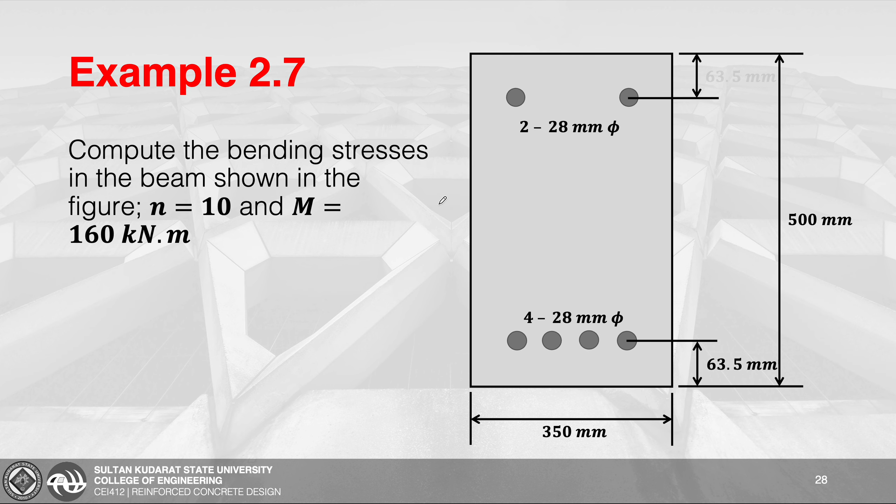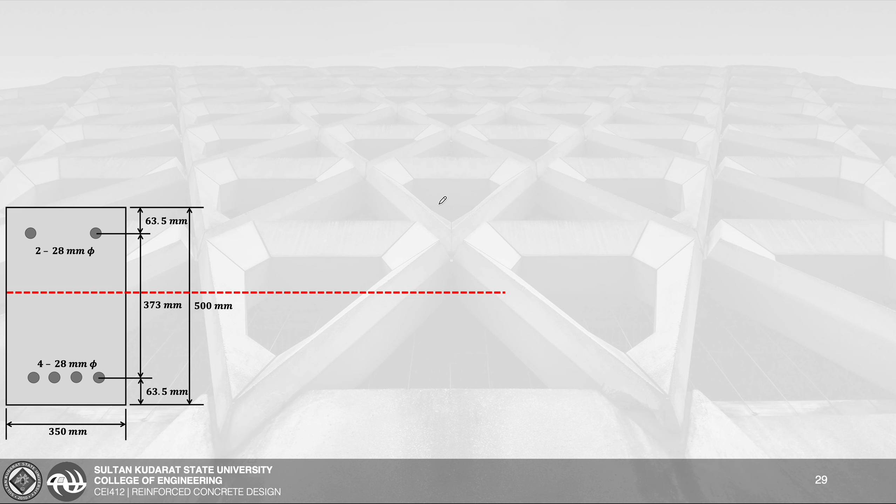Now, for our solution here, first, mag-project tayo ng location ng ating neutral axis. After that, yung mga construction lines for our guide. Now, take note, this is considered to be a doubly reinforced na concrete. Bakit tinawag siya na doubly reinforced? Kasi meron tayong compression steel, tsaka meron tayong tension steel. So, since meron tayong compression steel dito, we still have to transform it into its equivalent na fictitious na concrete area. So, yung equation dito, basta compression steel, is (2n minus 1) times As prime.

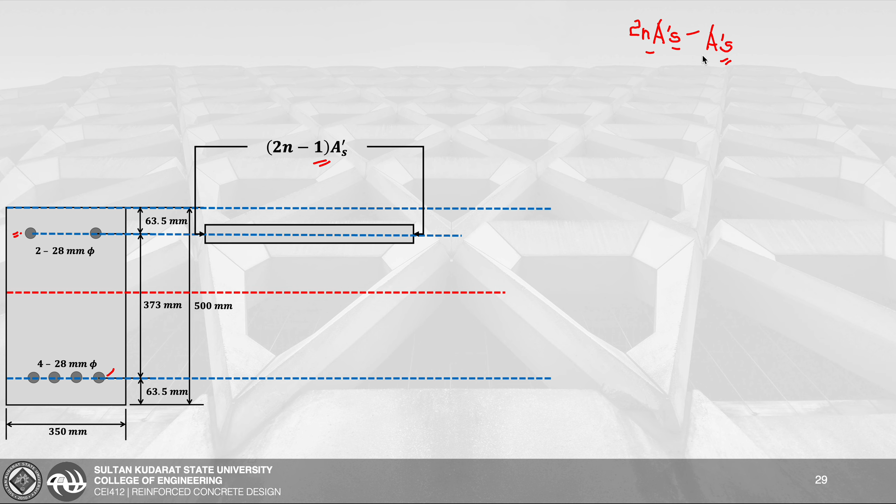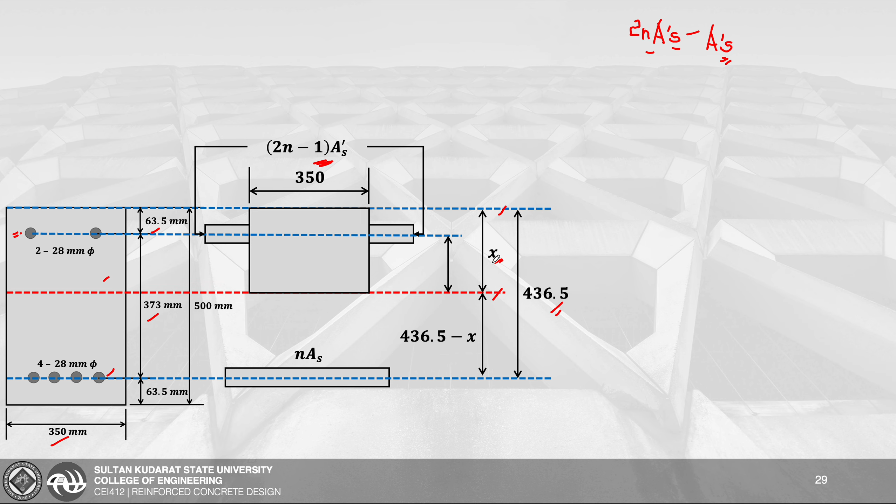After that is yung section ng ating concrete sa compression side. Yung width nito is 350 based sa ating problem. Then, we have the transformed area ng tension steel as is, n times As. Then, we have the distance x, the location of our neutral axis, galing dito sa extreme fiber sa compression side. Then, we have our total depth na 436.5, which was calculated by adding 373 tsaka yung 63.5. So, yung remaining na distance dito is 436.5 minus yung x na distance. And then, we have here another distance. Para makalculate to, yung x, babawasan na lang natin ng 63.5.

So, after that, solve natin yung total na area ng ating compression steel. And this is equivalent to 2 times pi times diameter 28 squared over 4. We'll get this value. After that, calculate natin yung (2n minus 1) times As prime. 2 times yung n natin is 10 based sa problem, minus 1, times yung As prime. We'll get this value. After that is yung As. We have 4 na 28 mm diameter. So, 4 times pi times 28 squared divided by 4, we'll get this value. After that is yung n times As. Yung n natin is 10 times yung As, you'll get this value naman.

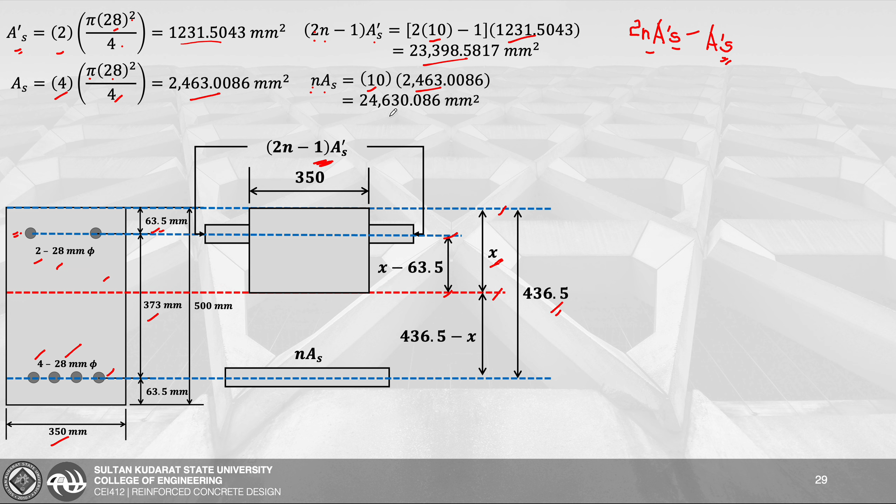After that, we're going to take the moments about the neutral axis. So, unahin natin yung area ng concrete. Yung dimension nito is 350 by x. So, 350 times x yung area times yung centroidal distance papunta sa neutral axis, which can be calculated by dividing x by 2. After that is yung transformed area ng ating compression steel, 23,398.5817, multiplied by its centroidal distance na x minus 63.5. And this is equivalent sa transformed area ng ating tension steel na 24,630, multiplied by the centroidal distance na 436.5 minus x. So, we'll get x equivalent to 160.6938 millimeters.

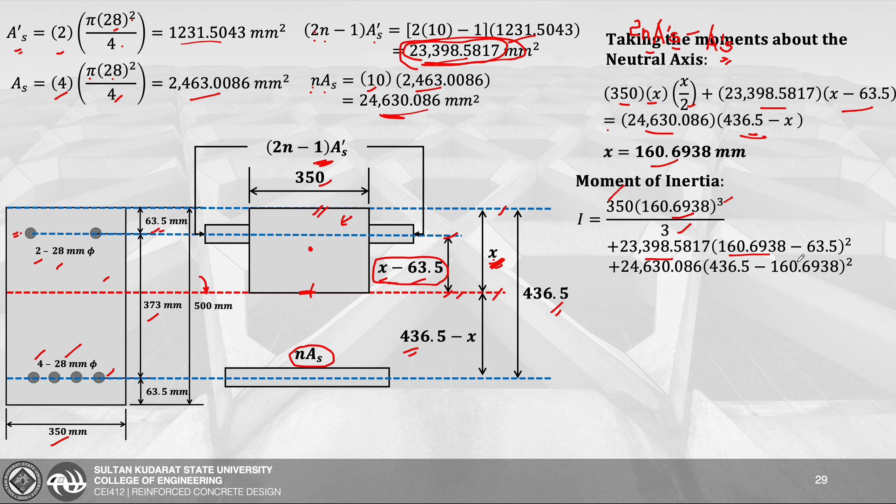After that, we're going to compute the moment of inertia. Take note, yung neutral axis, nag-coincide siya sa edge ng ating concrete dito. So, we're going to make use of bh cubed over 3. Yung b natin is 350, yung h naman is x. So, 350 times 160.6938 cubed, divided by 3. Plus yung transformed area ng ating compression steel na 23,398.5817 times d squared. Yung d na distance nito is x minus 63.5, so 160.6938 minus 63.5. Then don't forget na squared kasi Ad squared, yung formula sa transfer moment of inertia.

Next is yung transformed area ng ating tension steel, 24,630, multiplied by the distance papunta sa neutral axis na 436.5 minus 160.6938, squared. We'll get the moment of inertia na 2,578.7355 times 10 to the power of 6. After that, the bending stress. So, fc is equivalent to My over I. Yung M natin is 160 kilonewton meter, multiplied by 10 to the power of 6 to convert to Newton millimeters. Yung yc is our x, 160.6938, divided by I, 2,578.7355 times 10 to the power of 6. So fc is 9.9704 megapascals.

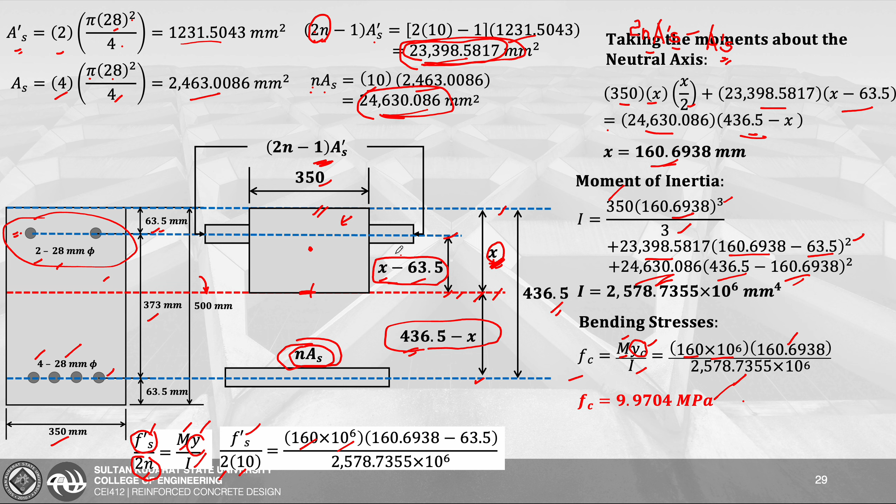Now take note for the steel, meron tayong compression steel tsaka tension steel. For our compression steel, the equation is fs prime over 2n is equivalent to My over I, where fs prime is the compression steel stress. Bakit na-divide sa 2n? Because of the creep effect. By direct substitution, fs prime divided by 2 times 10, equals 160 times 10 to the power of 6 Newton millimeters, times y, which is x minus 63.5 where x is 160.6938, divided by I. So fs prime is equivalent to 120.6097 megapascals.

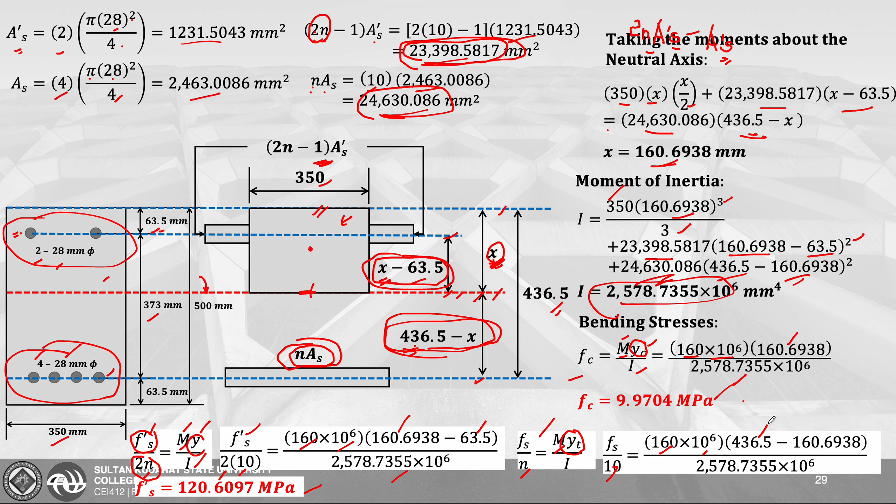After that is yung stress ng ating tension steel. We use fs over n is equivalent to M yt over I. By direct substitution, n is 10, M is 160 times 10 to the power of 6 Newton millimeters, yt is 436.5 minus x na 160.6938, divided by the moment of inertia. So, fs is equivalent to 171.1265 megapascals.